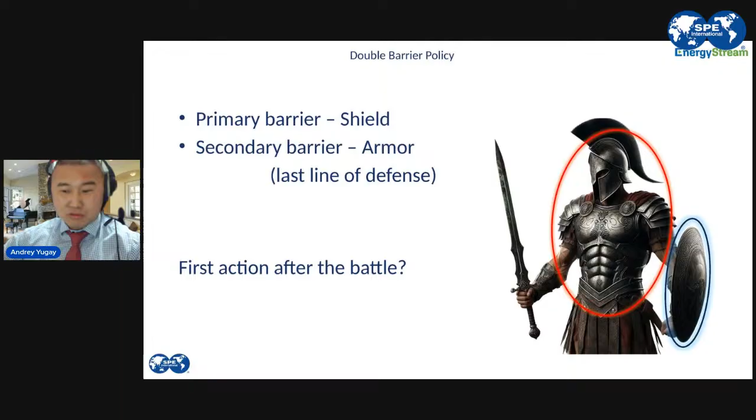So now coming back to our business. On the right side, you can see the picture, a representation, illustration of double barrier policy. We have primary barrier envelope, the one with the blue color, and the one in red is our secondary barrier. Same with the well. Whatever is in direct contact with hydrocarbon, whatever is continuously under pressure, is our primary barrier. If primary barrier fails, tubing leak or packer leak, then secondary barrier is our last line of defense. If the secondary barrier fails, we're going to have a well control incident in the production phase, a well blowout, which is something that well integrity should not allow to happen at all. That's our role.

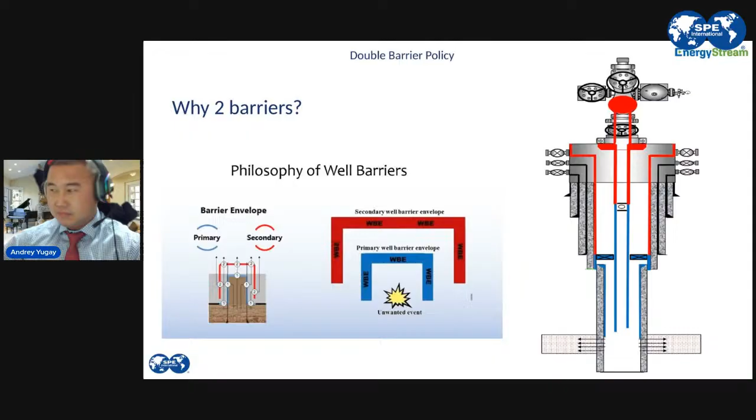Unfortunately, sometimes it happens. When I'm talking about secondary barrier envelope, mainly I'm talking about the condition of our casing. Because, for example, wellhead equipment is also part of the secondary barrier envelope, but it has quite a strong, big design factor. The thickness of the wellhead is much higher than the thickness of the casing. And casing can degrade, casing can get corroded. Mostly casings are made of carbon steel, and carbon steel is not stainless steel, it's not a CRA alloy, so it can get corroded.

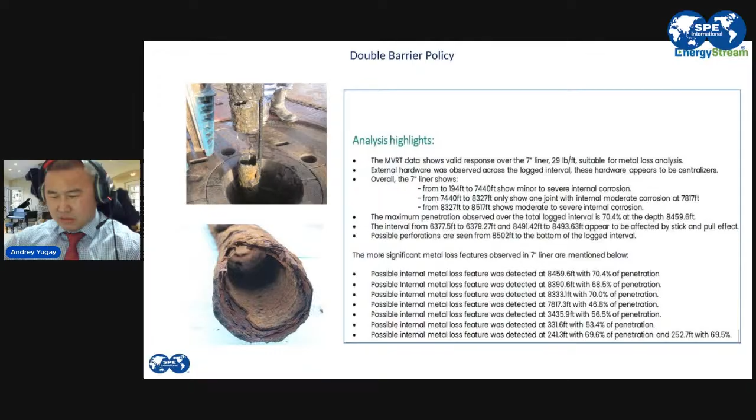During the workover, the tubing was retrieved in pieces. It was severely corroded, just junk, just nothing - complete corrosion of the tubing. And the casing, all the way from top to bottom, was severely corroded internally. This is, as you can see, all the way from top to bottom, at different depths. This is an example.

Because what happened in this particular workover, the drilling team was so scared that they almost didn't have a barrier in place. So the well was plugged and abandoned straight away.

Now, how can we control the corrosion of the secondary barrier? From outside, we can use coating. From inside, we need not to expose it to the corrosive environment.

What about the conditions in between? How can we prevent it? You see on the right side, there is corrosion, and this corrosion actually happened at 950 feet. Top of cement is at 950 feet, and then we got this corrosion happening. How can we prevent this, basically?

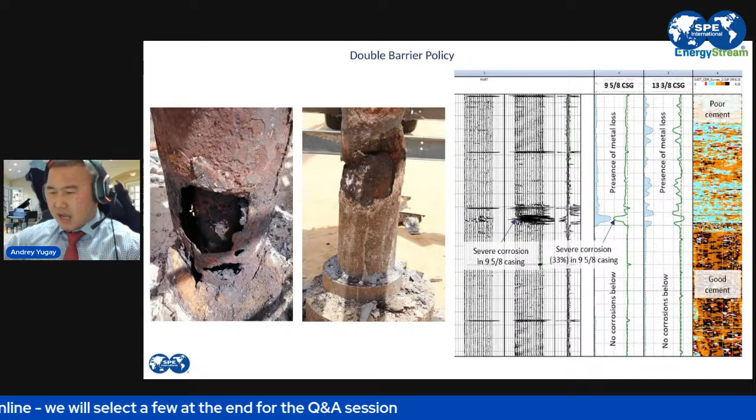So in order to prevent our barrier failures, we need to understand the root causes. We need to dig into why it happened, so that this fluid, which is contaminated with cement, is not treated against corrosion. And this fluid is corrosive.

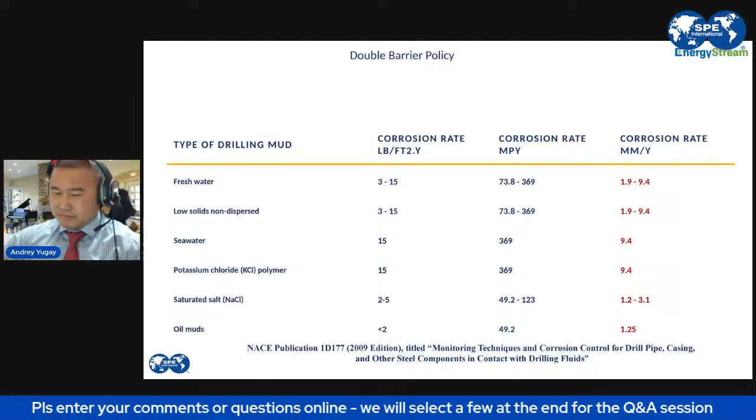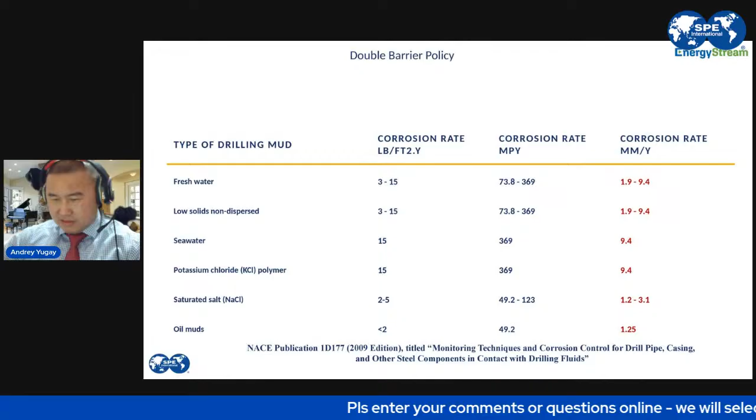I'll show you something now. This slide is not something that we created, it's a NACE publication. NACE, National Association of Corrosion Engineers, recognized the hazard from drilling fluids itself.

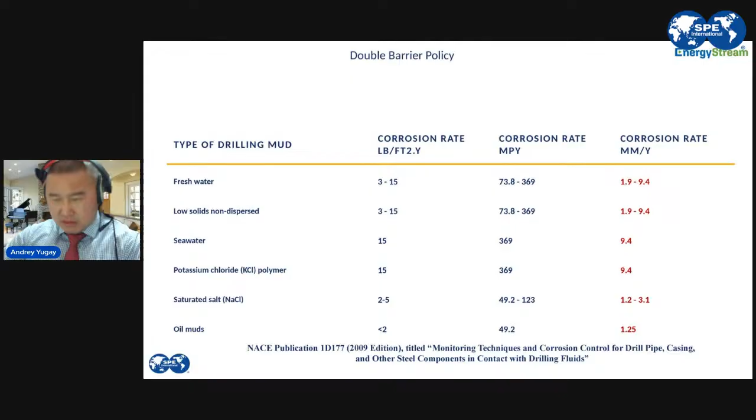For example, you know what is Pepsi, you know what is cola, you know that we use CO2 gas to make those carbonated drinks bubbly. So how much ppm of CO2, for example, is in one bottle of Fanta? What is the concentration? You can guess, who knows, type in the chat. I will tell you, around 6 to 7,000 ppm of CO2 is inside the cola or Pepsi or Fanta.

NACE recognized that there is a very high corrosion rate of drilling equipment and well equipment, sometimes reaching, as you can see here, 9 millimeters per year. What is the thickness of our casings? It is around 9 millimeters. So imagine the corrosion rates could be so high that we can lose our casing in one year.

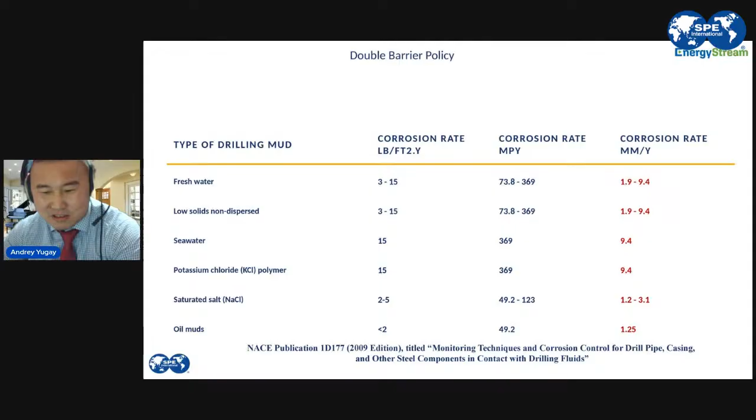Now, why am I talking about Pepsi Cola, what does it have to do with this? You know what dissolved oxygen is? Same as dissolved CO2 in the Fanta or Cola or Sprite. Basically, the safe limit in a closed system for oxygen is 20 ppb, parts per billion.

However, if you take any bottle of water, even though there was no oxygen there at all, once you open it and expose it to atmosphere, immediately you get some amount of dissolved oxygen inside. In the water we use for our drilling fluids, drilling mud, chemical wash, spacer, low viscous pill, the amount of oxygen is 8 ppm, but the limit is 20 ppb. So we're talking about plus minus 1,000 times exceeding the maximum safety limit for the corrosion reaction due to oxygen. Oxygen induces the corrosion reaction, and oxygen is a consumable of the corrosion reaction.

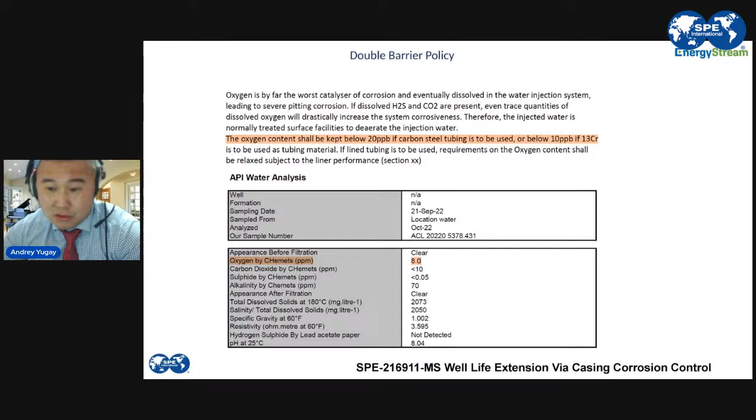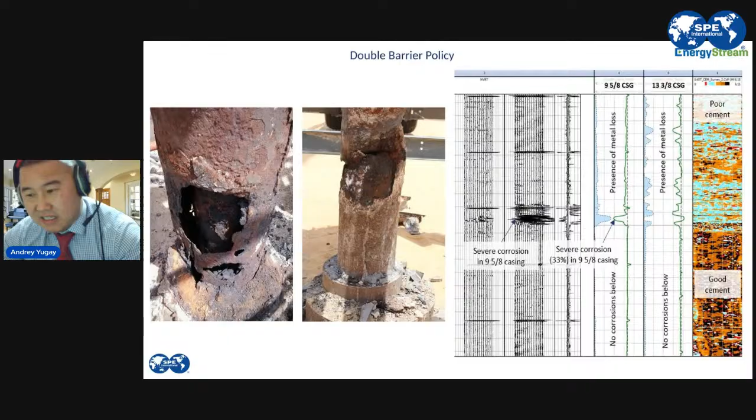This can be controlled with the usage of chemical corrosion inhibitors, biocides, oxygen scavengers. Such corrosion as shown on the right side could be prevented if we control our fluids so they don't get contaminated with cement slurry and get trapped. And you know, stagnant conditions could be even more dangerous than dynamic conditions in terms of corrosion.

Now, degradation of secondary barrier. We are still talking about degradation of secondary barrier. How confident can we say that our secondary barrier is still okay? Cement can also get degraded.

Recently, I had a bit of an argument with one guy on LinkedIn who says no, cement doesn't change, cement is quite elastic, plastic, it's just what we see is debonding. For me, honestly speaking, the main function of cement is hydraulic isolation. So if it cannot provide hydraulic isolation, whether it's debonding, micro-cracking, or microannulus, I don't care. If it degrades, it degrades, whether it's cement or debonded.

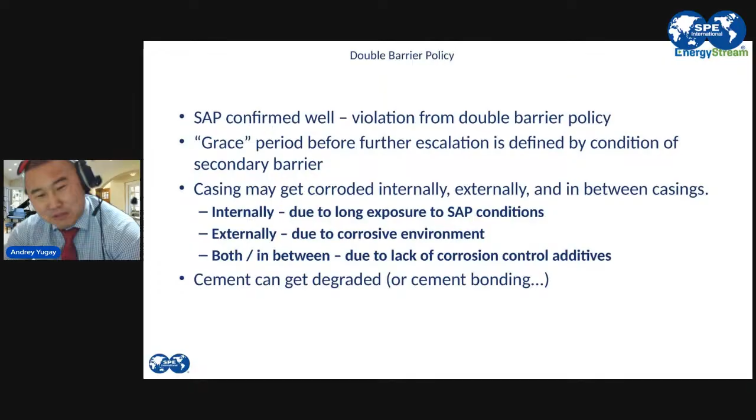The same guy I talked to on LinkedIn says the cement doesn't crack under tension because there's a formation around it that supports the cement due to overburden stress, since the formation isn't 100% solid, and due to the creeping effect of shale salts. Then I got confused, because honestly, if we have a creeping effect, if you have outer forces pushing our cement, then how can we get debonding? So I stopped the discussion.

So let's move further. We have two warriors, on the left side warrior number 1, and on the right side warrior number 2. You can put in chat which one you'd prefer to fight if you have to. Imagine you are a gladiator in the arena, a Colosseum, and you have to fight.

What I see here, if we want to survive, if we don't want to die, our choice would be the guy on the right side, guy number 2. Why? Because he has fewer barriers, so it might be easier for me to kill him rather than the guy on the left side, correct? So what changed? For the guy on the right side, the risk of getting killed is higher, agreed?

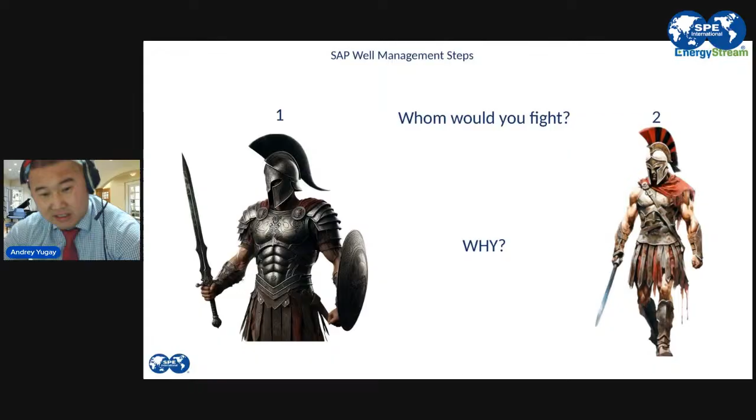So same we're supposed to do here. If we have tubing leak or packer leak, it means we have a violation from the double barrier policy. That means whatever initial risk level, risk ranking, or risk register you use, whatever it had at the beginning when the well was healthy and having 2 barriers, now the risk level is different, correct? The risk of what? The risk of well blowout.

That's what well integrity objective is, to prevent well blowouts. And when you evaluate the risk of the well, when you give it a risk level initially, obviously after losing one of the barriers, your risk level should increase, correct? So first thing what you need to do once you get the evidence that the well lost one of the barriers is to reassess the well. Makes sense, correct? Logical. Because you don't know.

Maybe I have enough time to do my diagnostic investigation, presentation, study, maybe. Or maybe the situation is really critical. Maybe it's a very old well. Maybe the casing is corroded. Maybe there's already an underground blowout, I don't know. Maybe the blowout can happen anytime from now.

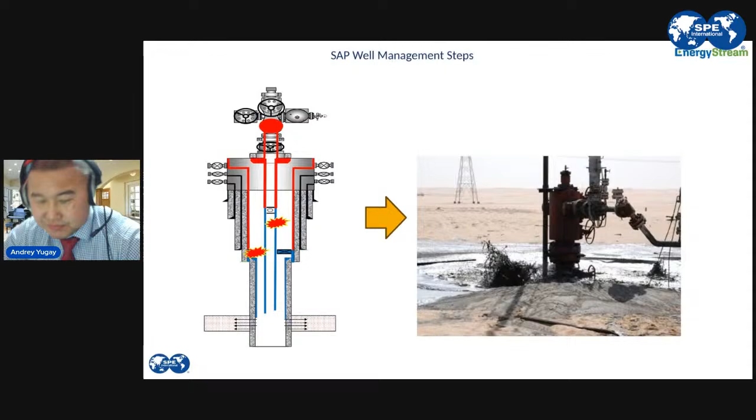Now, let's say everything is okay. So that's my SAP well management steps. The logic and chronology and the sequences, for me, it's quite logical, but please comment, okay?

I need your feedback. So we do wellhead pressure monitoring. We discover there is anomalous pressure and it is more than 100 psi. And this is not induced. It's not a gas lift well, or there is no chemical injection causing the anomaly.

So what we do? We need to do bleed off, build up, yeah? BB test, someone calls it the BB test. We bleed off, and if it builds up again next day, that means I lost one of the barriers. So I get my well SAP status confirmed.

Now, the SAP status needs to be registered in the systems. That's what I noted, as per studies done by many companies, not even in the oilfield industry, people spend a lot of time just looking for the data, collecting the data within the company database. So it is very important to register it somewhere.

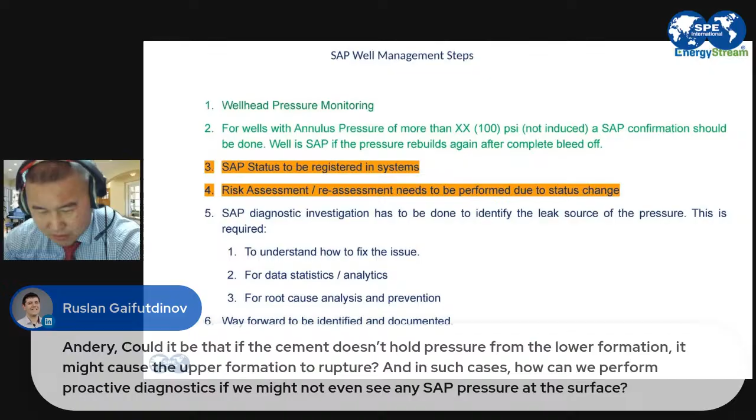And then we need to do the risk assessment. Guys, I will handle all the questions at the end, okay?

So let's say risk assessment shows that the well is not critical, not high risk, and we have a grace period. So we need to do the diagnostic investigation. Why do we need to do it? Why do we need to understand what exactly failed? Why do we need to identify the leak source?

First of all, to understand how to fix it. Because currently on the market, there are challengeable solutions on rigless barrier restoration. For a tubing leak, it could be a tubing patch or straddle packer. For a packer leak, it could be some other new technologies available on the market, with maybe a 50-50 chance for success. Then we also need it for data statistics, for analytics.

Because if we see repeating trends on something, we could do something to prevent it. And also for the root cause analysis, that's the main solution for the identification of root causes. And if we identify root causes, we can prevent them. Yes, we can eliminate them, and similar incidents will never happen again in the whole field.

And then after all this is done, after the situation is clear, we can identify the way forward. There are many options here. Yes, we may immediately kill and secure the well, send it for workover.

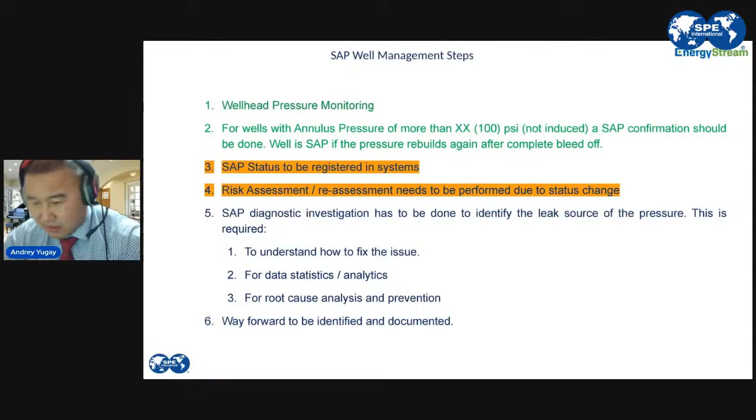Now, a little bit about the understanding of risk, because even within the same company, there is some kind of misalignment, misunderstanding on what the risk is.

So what is the risk? It's a combination of something and something - yes, it's a combination of hazard and activity. Pressure is a hazard. Operating the well, having the well exposed to the pressure, is our activity.

So if we don't want to have a risk, we can either eliminate the hazard or the activity. But normally what we do, we just install barriers between the pressure and the exposure area - surface, or if we have underground permeable aquifers, we need to isolate in between the pressure source, our reservoir, and the aquifers.

Normally there should be a cap rock there, okay? A natural cap rock if you have pressurized reservoirs. And by the way, the subject of today's discussion is not about wells which are dead, not about wells which have no pressure at surface, where you use ESP or gas lift or whatever. It's about wells that can flow naturally, which comply to double barrier policy.

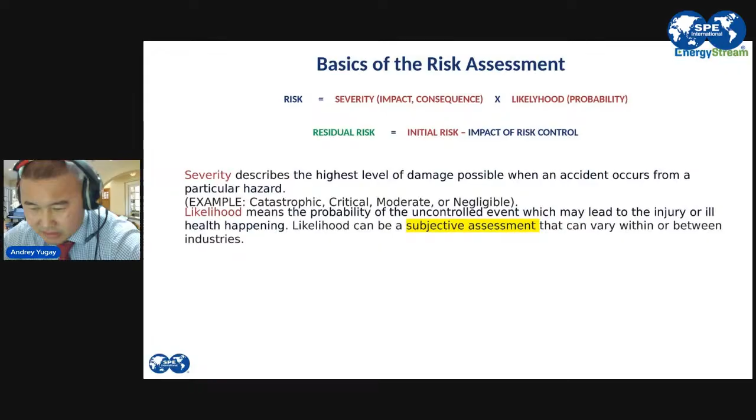This safety bag reduces the risk of the car incident, the risk of personal injury in case of a car incident. But what exactly does it affect, probability or severity? You can type in the chat - do those airbags, safety bags, reduce probability or severity?

So what is the difference between mitigation and prevention? Prevention measures aim to reduce the probability of the incident happening. Mitigation means your incident happened - assume that your incident happened, well blowout happened, personal injury, car incident happened. So mitigation is when you apply measures to reduce the damage, reduce the impact of the incident.

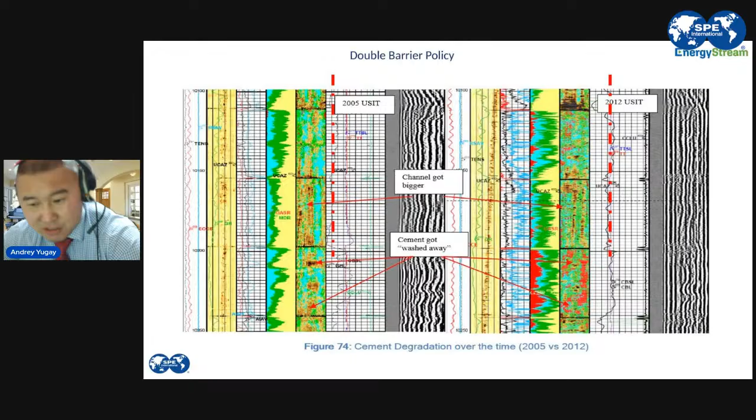I cannot do anything else. But maybe I have some mitigation measures. What could be my mitigation measures? We can think about it on the next slide. But what I try to say here is...

If we talk about a healthy well, which has two barriers, and we are talking about the risks, the risk will be, in my mind, the failure of the primary barrier. And if it happens, I have my secondary barrier. In this approach, the secondary barrier is my mitigation, correct? I assume that I got the loss of the primary barrier - it happened, the failure happened, I got pressure in my A annulus or B annulus. And then my secondary barrier is my mitigation. So, just to stay on the same level of understanding of what prevention is, what mitigation is.

The likelihood or probability of a well blowout happening, if the well is already in this condition, depends on your confidence in the condition of your casing. If you're 100% confident your casing is okay, because you tested it recently during the last workover, did the corrosion log, and you're confident it can hold, you tested at 2000 PSI and now your pressure is 500 PSI, and it happened just yesterday, then you're confident.

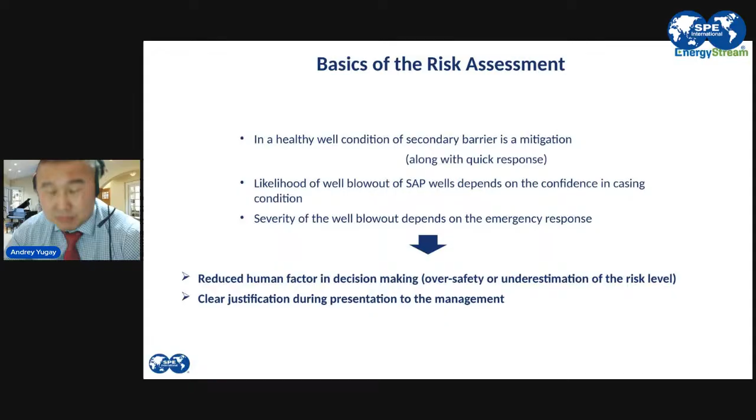Let's talk about the case of SAP B or SAP C. We have pressure coming from the reservoir, production casing set in the reservoir, exposed to pressure during cement setting. During this transition period, pressure migrated, created a channel, and the outer casing might get corroded externally because it is located across the aquifers, and cementation across aquifers is not always up to expectations. We might have corrosion of the casing rather easily.

We don't know if it will be corroded or not, because we didn't log the casing. We don't know the condition of the casing, so we have zero control on the probability of failure. And maybe the failure already happened - maybe you have an underground blowout, underground cross flow from reservoir to aquifers or other formations, and you don't know about it. You can do a leak detection log to check if there is any active cross flow.

Sometimes we don't have full control on the probability of the incident happening, but we can work on other control measures. In this case, periodic surveillance. The best choice would be a permanently installed fiber optic cable that will show everything.

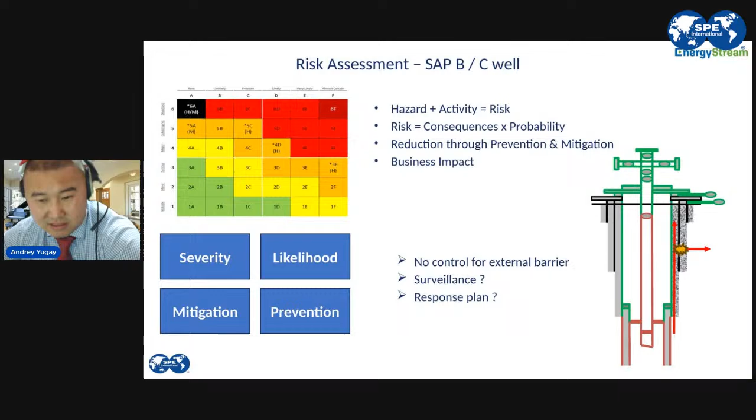Let's think together - did we? What exactly did we reduce? Have we reduced the probability of the failure happening? That didn't change. If the outer casing gets corroded, that's it.

But we reduce the pressure, so it may happen later, not now. At the moment, we can say yes, by reducing the pressure we postpone the incident. We extend our grace period. Because if your external casing is corroded, there will be a time when, at the place of corrosion, it's going to burst due to internal pressure. By decreasing the pressure, we extend the grace period.

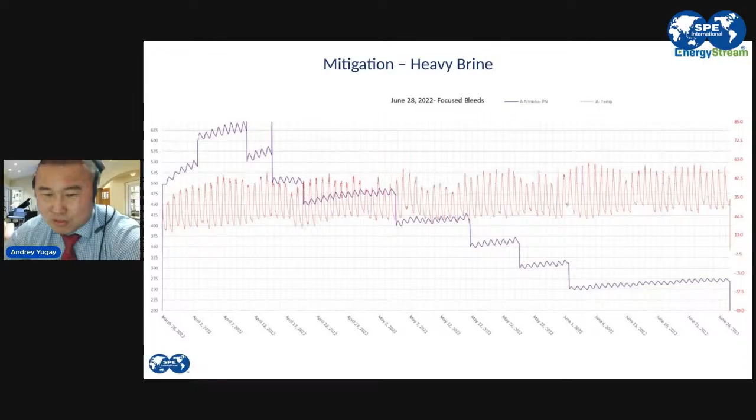But again, we don't know unless you know. You can judge, you can evaluate, you can consider it, but you need to know the corrosion condition of your casing - what is the ultimate wall thickness or metal loss.

Now, in terms of the severity, look. Let's say it will happen at surface, and instead of 500 psi, we have only 200 psi. But still it's going to flow, and all that heavy brine that we injected, and it's not much honestly speaking, it's going to flow back. And then we're going to have again high pressure. So in terms of severity, I don't think we change something. But it's a kind of control measure which may extend your grace period. And you need to know exactly what you're doing, because that needs continuous human intervention and monitoring.

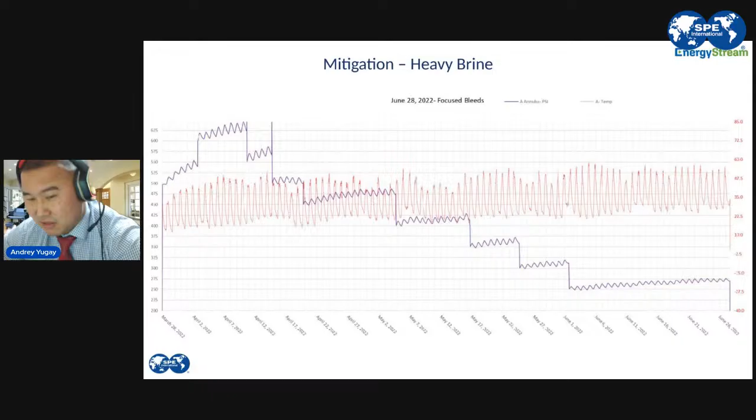Now, let's think of a SAP well, SAP A scenario, yes, tubing leak. So what could be our prevention measures and what could be our mitigation measures. In mitigation, again, it's easy. I just assume that secondary barrier failed as well, we have a well blowout. So what are we going to do? Do we have all those measures? Do we have gas detectors, H2S detectors, fire alarm detectors, automatically activated that informs the control room?

Connected to maybe a shutdown system that automatically shuts down the well, and then there is a clear response plan. There is a team that will be immediately mobilized. The team will be equipped with proper resources to cure the issue. That is our mitigation measures, yes? And obviously barricade, radio system, everybody aware, no one in the area, the area is isolated. So this is our mitigation measures.

Prevention measures here, it's all about the condition of our secondary barrier, the remaining one, honestly speaking. What is the probability of the incident to happen? It's just a condition of your casing. Just think about it. That's why I spent so much attention at the beginning about casing corrosion.

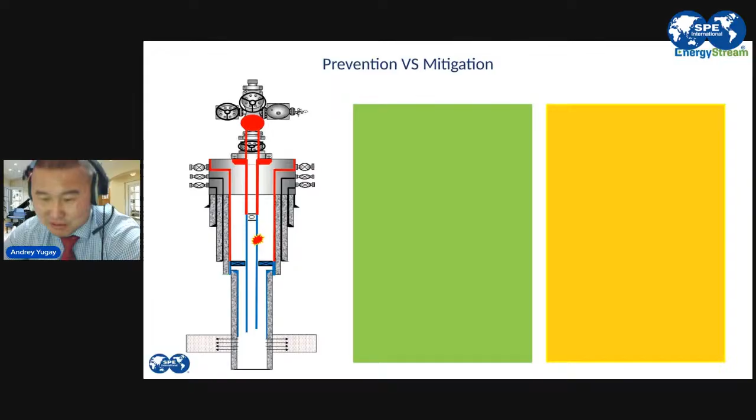I will start with the questions in the comments. Okay, let's take the questions as they came. I'll show them on screen. Yeah, so Ruslan has a question. Andrey, which proactive steps would you recommend based on your experience to prevent corrosion, especially on outer casings

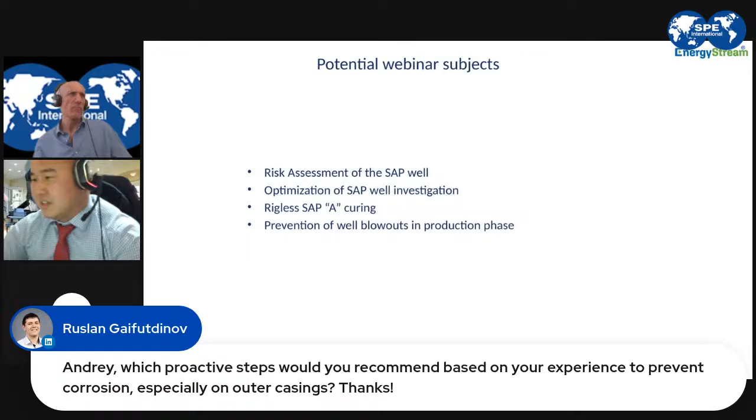Okay, yes, obviously. Look, there are several options on the table. One of them is the most solid, which is use CRA material, stainless steel casing, which is the most expensive but the most robust one, if your company budget allows you. A win-win solution could be coated casings, externally coated casings, and control of your fluids that you use just before cementing. The fluid that gets contaminated with the cement gets trapped in your casing void spaces.

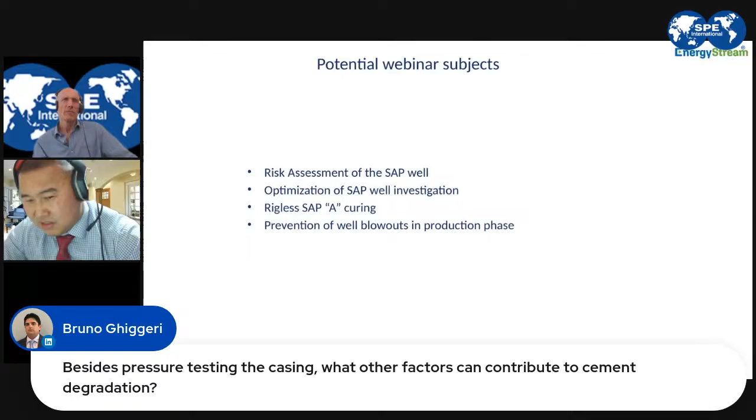Besides pressure testing the casing, what other factors can contribute to cement degradation? Well, it's all about pressure and temperature cycling. But if we're talking about special projects like CO2, if you have CO2 you need to use CO2 resistant cement. If you have high H2S, you need to use H2S resistant cement. But chemical degradation of cement normally doesn't happen in most environments in the oil field industry. So it's normally just pressure and temperature cycling.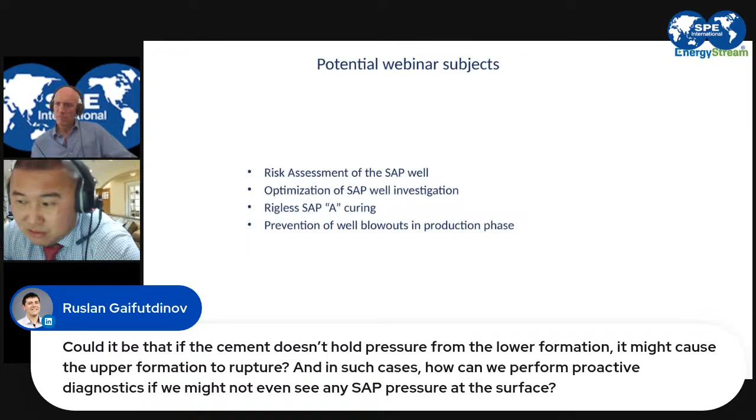And could it be that if the cement doesn't hold pressure from the lower formation, it might cause the upper formation to rupture? And in such cases, how can we perform proactive diagnostics if we might not even see any SAP pressure at surface? Let me try to understand the question. So basically, we don't see any pressure indication at surface, and we have cement degradation at the bottom, and the pressure from the bottom migrated to the upper through the original cap rock that initially was okay, but since we drilled the well, we created a path and the isolation was not good, and we created communication.

Yes, obviously, it may happen that the formation, which has never been exposed to high pressure, becomes exposed after we drill the well through several formations. It happens, yes, and it gets pressurized. Not really a rupture though. I mean, it takes a lot of effort to create a fracturing, during fracturing operation we use a lot of units, we create very high flow inside the well. I'd unlikely it will be a rupture, but yes, the upper formation can easily get pressurized and may leak further.

So a few questions and comments from me. What are the typical sources of corrosive fluids that you have seen at ADNOC? Sources in terms of formations and fluids in terms of nature.

For the internal barrier, when talking about tubing corrosion, normally there are no cases of outer tubing corrosion, because outside we have completion brine which is inhibited with anodes. Inside, what really triggers the corrosion is not really H2S. It's a rare case when we really notice H2S or CO2 corrosion, but water is our main enemy.

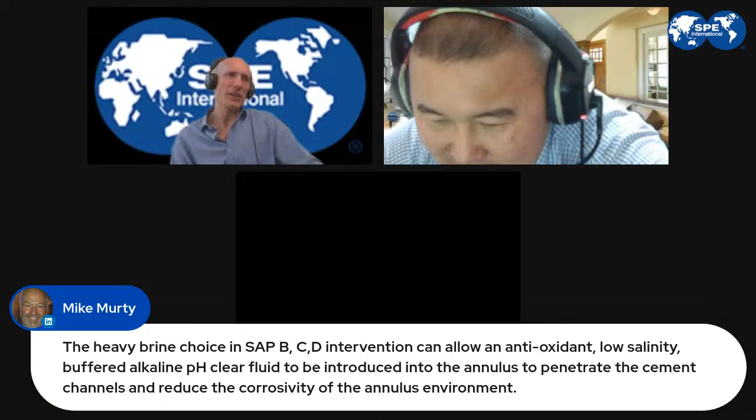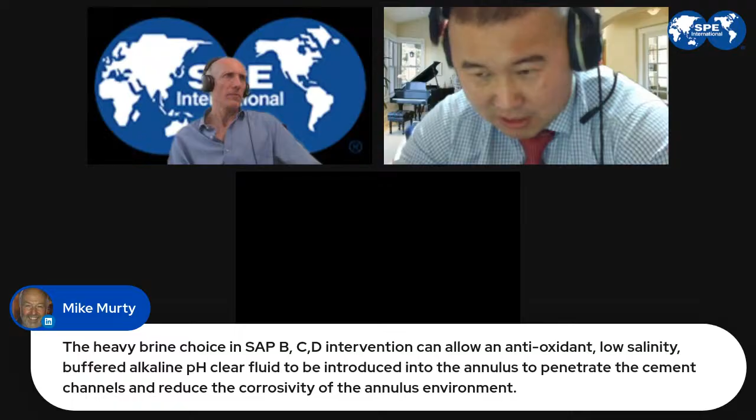There is a question by Mike on the fact that the introduction of heavier fluids in an annulus also offers the option to use some buffered fluids treated for corrosion, so a number of additives that might help address the corrosion situation. I have to admit, yes, if you have injectivity and you manage to inject your heavy brine down to the corrosion point, the potential leak point, and the issue is internal corrosion of the outer barrier, yes, it can help. Agree.

And then maybe one last comment from myself: you haven't really developed the sort of tools that you have used locally for diagnostics. You haven't talked about noise logs, you haven't talked about fingerprinting the gas or analyzing the gas, etc. So what's your experience been with that? Or the lubricate and bleed steps you showed - are there other ways to minimize the number of cycles?

I can answer this question, thank you for this question. So basically in terms of the fingerprinting, we have an expert who did a great job in terms of a really deep chemistry analysis of the effluent of B and C. Okay, but honestly speaking, if you look at the lithology of this area, all the pressure sources are located below the caprock.

And for me, as a well integrity guy, it doesn't really matter if it's reservoir 1, reservoir 2, reservoir X or reservoir Y. Anyway, my curing will be done above it, across the caprock. So that fingerprinting doesn't really help me.

But recently, we had a successful trial. We used 3 fiber optic cables from different service providers: 1 bare cable and 2 coated cables that were used as an intervention. So we didn't install it on the tubing or casing as an outer or inner installation - no, we ran it inside the tubing. The one which is a bare disposable fiber optic cable is designed to be cut and get dissolved inside the well. And then the coated cables, yes, we retrieved.